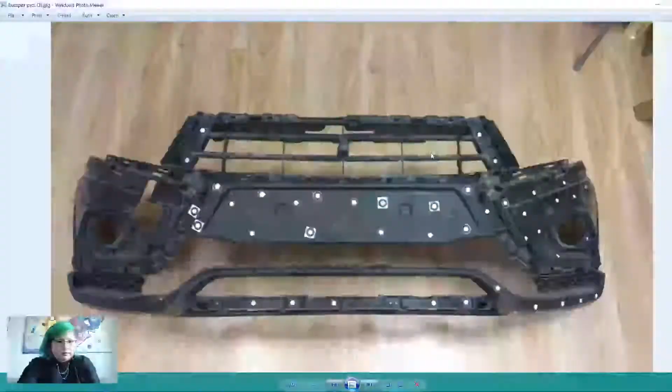Okay, and now you see on the screen a photo of the car bumper that I scanned. So as you can see on the left and the right sections where there would be the front lights, there are a lot of geometric features for the scanner to easily grasp. So those sections can easily be scanned in geometry mode in Calibry.

So now on the middle front section here, you do see that there's a lot of flat parts, so there are not enough geometric features for the scanner to grasp. Now, for example, if you were scanning a whole car, it would definitely be a good idea to scan it in marker mode, as the majority of the car, the front, the sides, the doors, don't have much geometry, so combining all of those scans in marker mode would be the best.

So this car bumper can be done in one scan, so you can place markers all over it. You can see that only about 2/3 of this bumper is covered in markers. When I scanned the bumper, I did apply markers all over it, so it is possible to do it in one big scan. You can also do it in sections and then align it in Calibry Nest. And that is what I will be showing you today. So let me go ahead and switch to Calibry Nest.

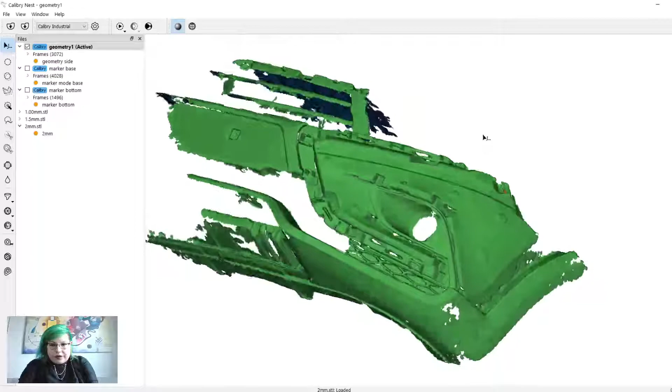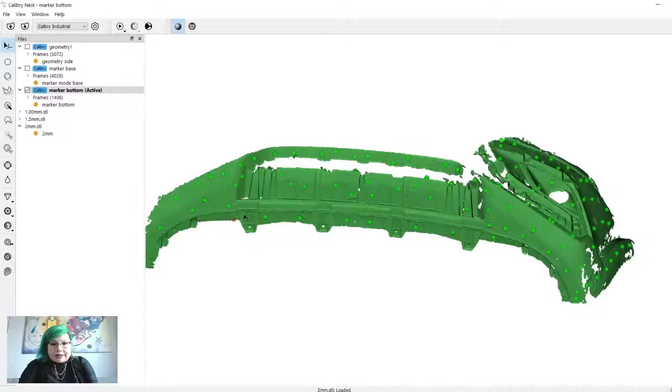Okay, and now you should be seeing the interface of Calibry Nest. So I scanned this side section here, where there's a lot of geometry, in geometry mode. So the scanner was able to grasp those features quite easily. Okay, and then I also scanned the whole surface in marker mode, and you can see some of the tracking markers on the surface, and I also scanned this bottom section additionally, also in marker mode.

So I have already post-processed each of these scans, which means that I have run the algorithm of registration and finalization on all three of these scans. So I have created a mesh model of all three of these.

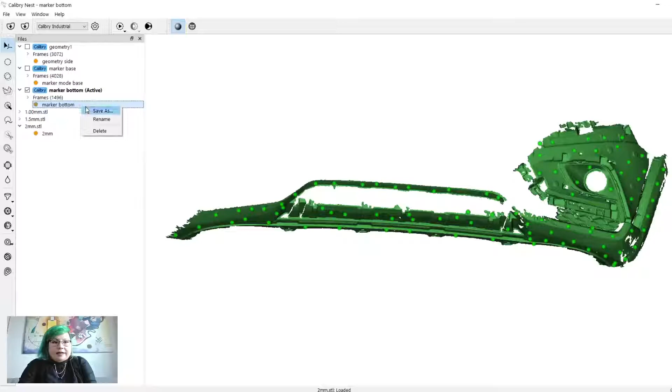Okay, so at this point, as Calibry Nest doesn't automatically save your results, you can go ahead and right-click and save all of your results separately in any format you want. You can also save the entire project with all of the changes you made and any of the multiple results that you generated by running the finalization algorithm.

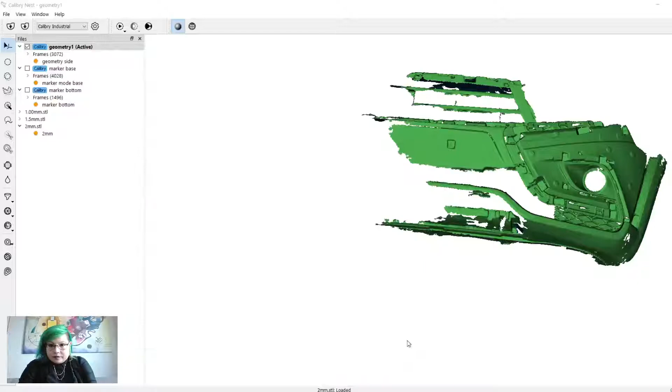Okay, so generally, most people, if they scan something in marker mode, they can easily align it in marker mode, and the markers help the overlapping sections come together quite easily. But if you have a piece scanned in geometry mode, like this side, it can also be quite easily combined using the same algorithm.

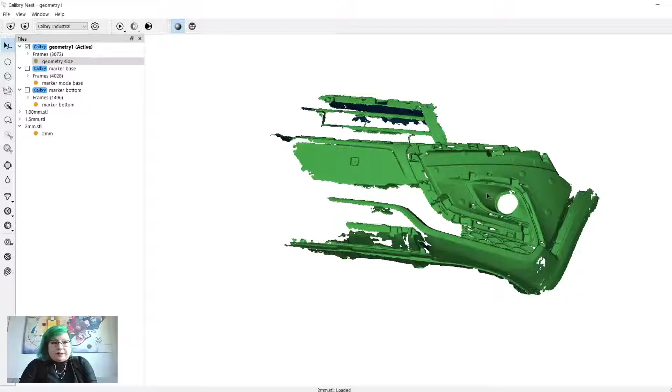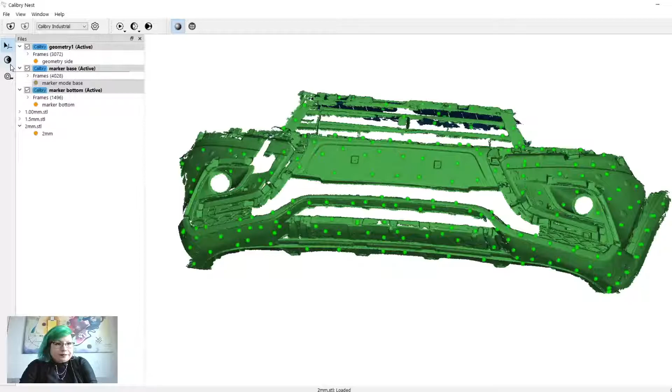So I ran the results for all three of these already, and now I can go ahead and select all three of my projects that I want to align. And at this point, we have this Align by Points button that should pop up. So I go ahead and click on it, and it takes me to the alignment window.

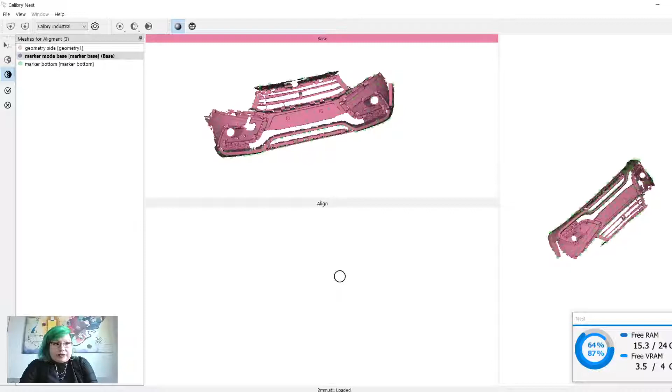Okay, I can set whichever piece I want. Usually I try to set the biggest piece as my base, and then I can add parts to it. For today I'm going to be combining just these three pieces. You can always combine 2 scans, 5 scans, 10 scans—it does not matter, the same technique will be applied to all of them.

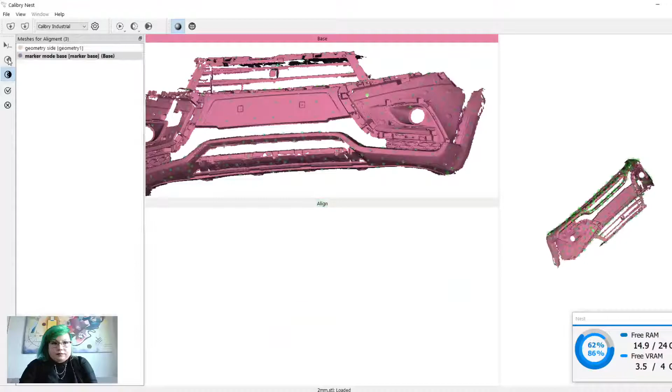So here are 2 scans that were made in marker mode—this part and the bottom part—and you can see there are overlapping sections. At this point, I just go ahead and press this button, Add to Base. Okay, and it automatically combines those scans by their overlapping markers. Quite easy, I don't have to do anything, I just have to add the 2 layers together.

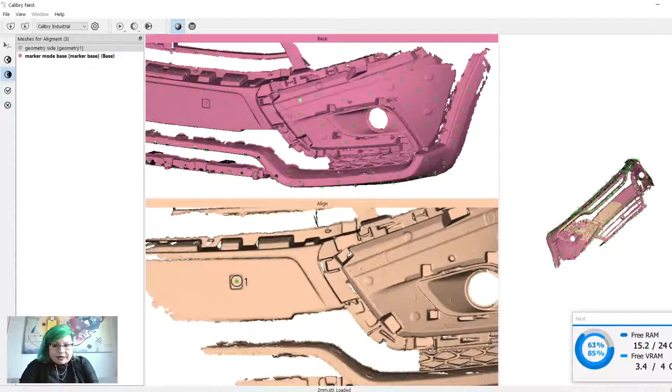Now, our geometry section has to be added in geometric alignment. To align pieces in geometry mode, you have to select at least 3 common points that our 2 scans have in common. I usually try to space these points quite far apart so that the algorithm has more information to combine. So I just apply these dots by double-clicking my mouse, like this. If I don't like where I have placed a certain point, I can always go back, double click on that point, and it disappears, okay?

And on the right hand side here, just drag that here. On the right hand side, we can see the preliminary view of how your alignment will be coming together. So if I'm happy with how this will be looking once I combine them, happy with the dot placement, then it looks pretty good.

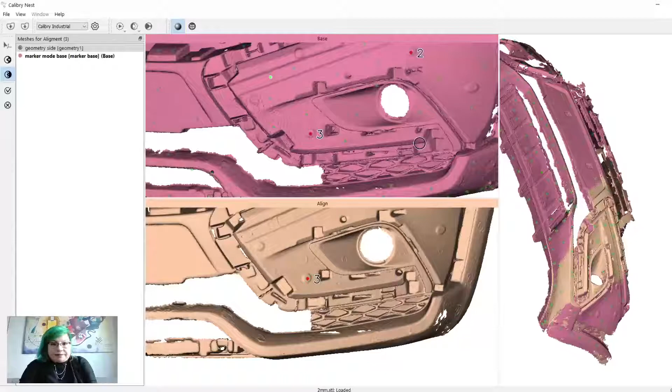I can always add more than 3 points—I can add 6 alignment points, I can add 10—but the algorithm will still kind of calculate it from the base 3 that we set. So as you can see, it will be combining quite well together, so we don't need to place any more points. It looks pretty good in our preliminary view here, and I also add that to base now.

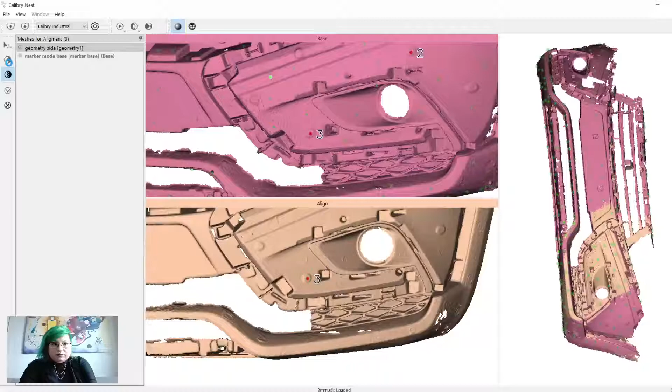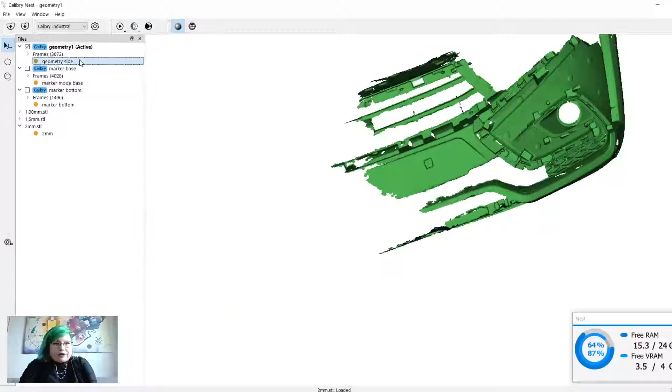Okay, so now we see a preliminary view of how our 3 scans will be coming together. This is still the preliminary view, we haven't combined the meshes yet. At this point is where we will be running the multiple registration and finalization algorithms. If you remember, we generated each separate result here to help us align. So running the same algorithm for all three will generate one solid mesh of all of your selected aligned scans.

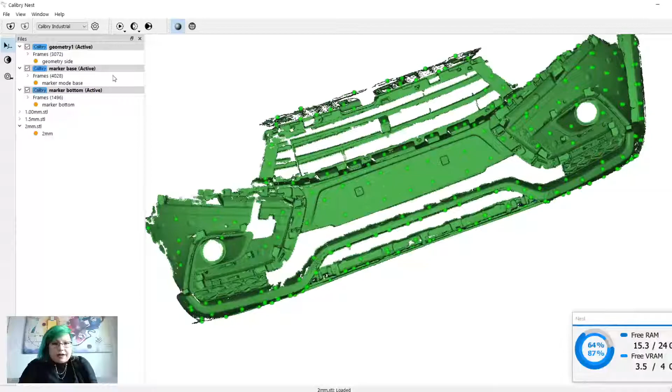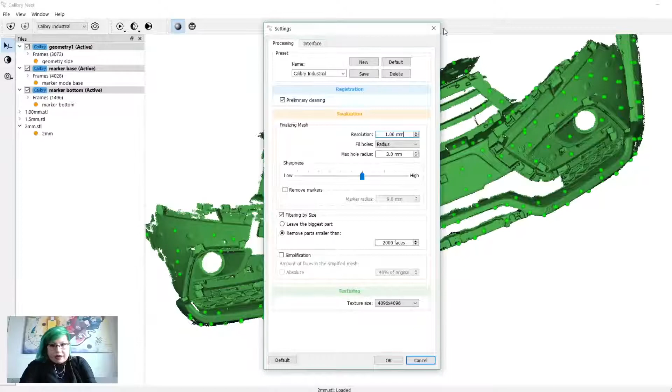Now, depending on the size of all of your scans, plus the speed of your laptop or computer—as you can see, I have opened up the memory tab so you can see how much of my computer's resources are currently being used. Okay, so initially when I made this model, I made it at about 1 millimeter of a combined mesh. Now that did take about 15 minutes total to combine all three of these scans.

So I'm going to be saving us a little bit of time, and I will be showing you the already finished results. I ran the algorithm multiple times and I generated several results, so let's take a look at the difference in what setting different resolutions will do for your finalized mesh.

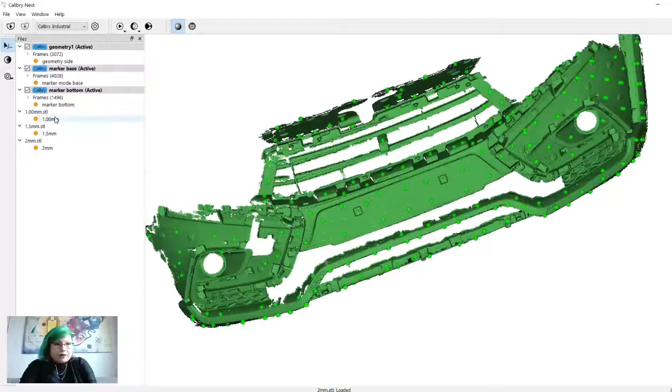So this was the result that was made when I made the setting for 1 millimeter, and that model did take 15 minutes to finalize and generate. You can see a lot of the detail—you can see both the marker mode and the geometry mode came together really seamlessly.

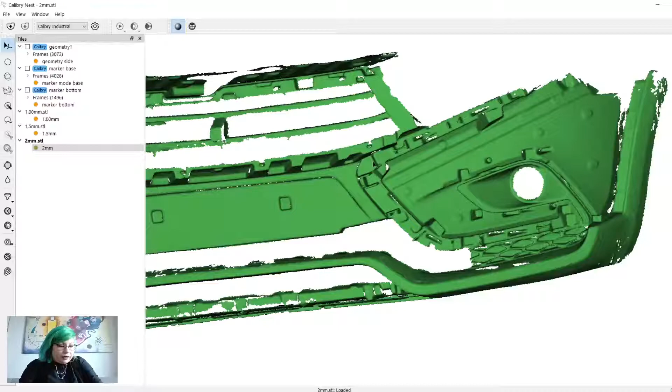It looks really good. I also ran the algorithm here at 1.5—you don't really see a big difference, just your model does less. And here it is at 2 millimeters, and that 2 millimeter model took me about 8 minutes to generate.

So depending on how low you set the resolution will determine how long the algorithm will generate your finalized mesh. You can always play around with that and see kind of how much detail you're willing to spare for the sake of faster processing.

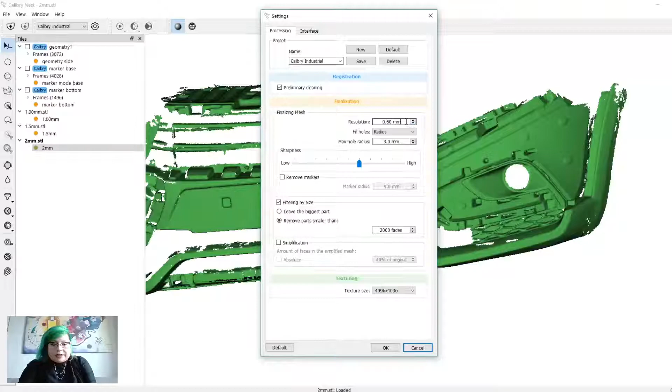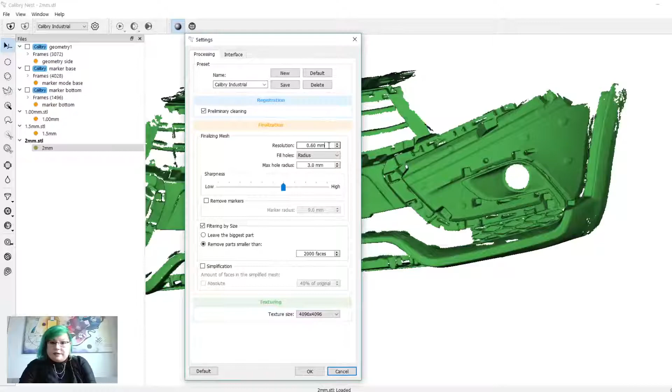As a reminder, the lowest possible resolution for the regular Calibry is 0.6. So of course it is possible to combine all of these scans at 0.6 to get the absolute crisp clarity, but then again it would take up more time and more of your computer's resources—possibly anywhere from 15 to 20 minutes depending on the speed of your computer. So those are the main factors to consider when you are merging scans.

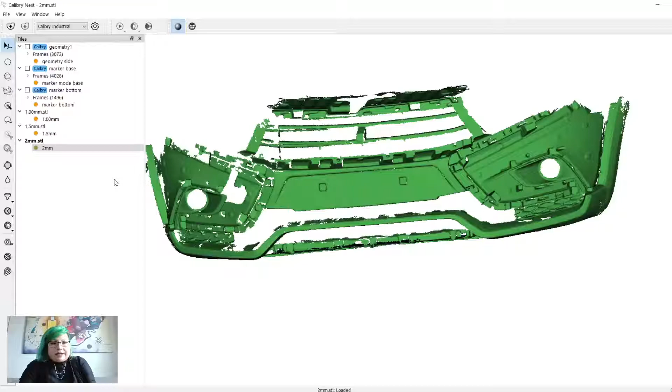Also, going back to each of my pieces, my base scan is about 4,000 frames, my geometry section is about 3,000 frames, so the weight of each of your individual scans also does influence the speed of your finalized combined mesh. So if you are combining many pieces that have a lot of frames each, then of course combining all of that data would take substantially more of your laptop's resources and your time.

If you're curious about the minimum specifications necessary to run all of our scanners as well as Calibry Nest, we do have that link available on our website.

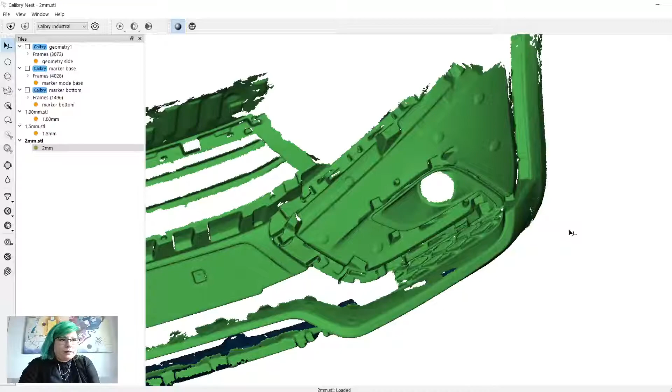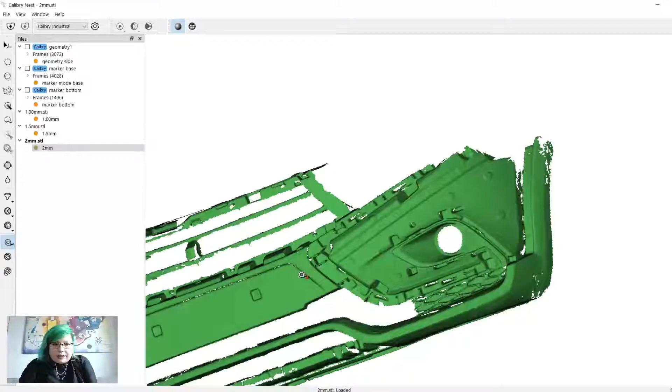Very good question regarding accuracy. For example, if I want to see how close to reality this finalized mesh is, I can use any of my tools on the side here in Nest. For example, the ruler - I can place 2 points anywhere on my model, and it will measure the distance, and you can compare it to the actual object that you have.

Now when you are aligning, you can see that all of the pieces came together quite nicely. If we go back to each individual scan, we can see how they looked, and since there are no ripples between where the scans would have combined, it looks pretty good.

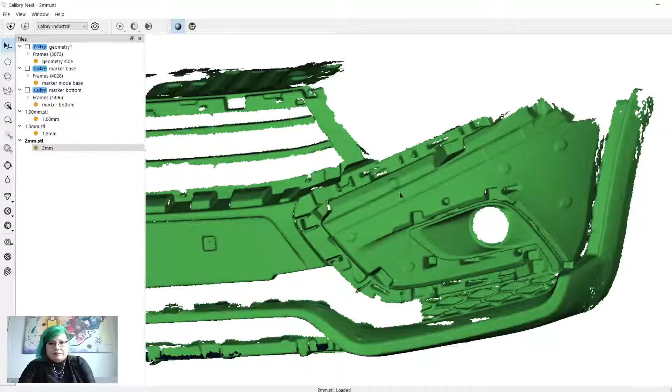So we do have that ruler option to measure any points on your model. We also have this option at the very bottom called the geodesic distance, and that can measure points along the curvature of any of the sides of your model.

And how that works is also shown in our manual. You can easily access the manual to read about any of the features in Calibry Nest. You can just pop open the help option, press F1, it goes to the manual, or you can also click on the manual section under the download section on our website.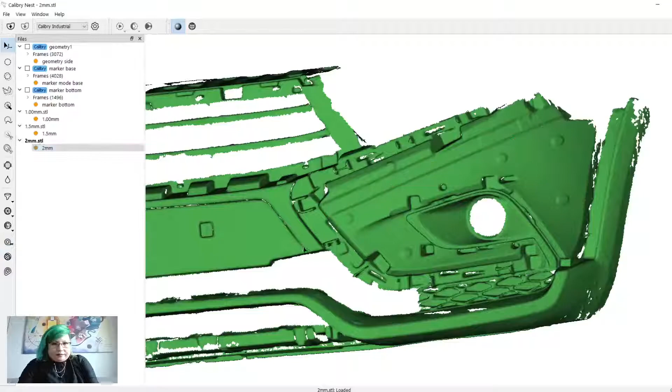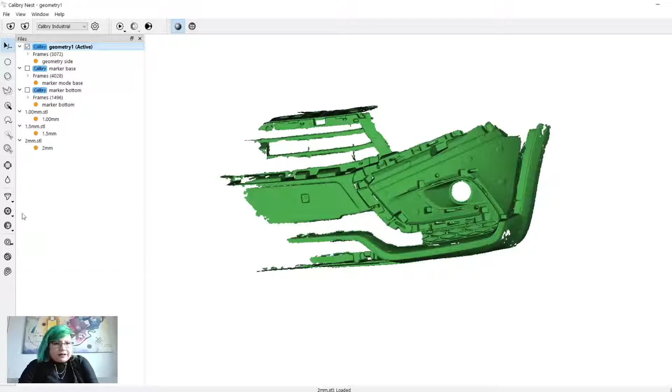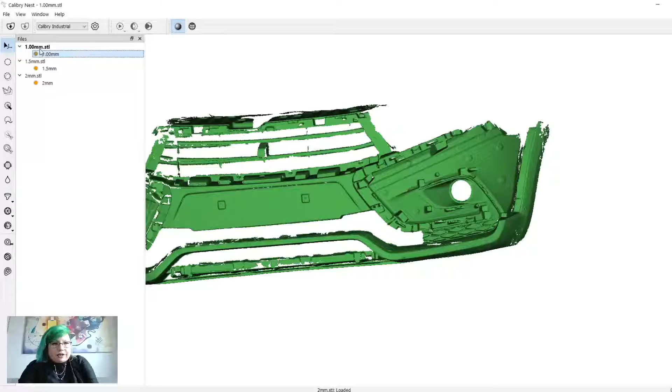To save my computer's resources, I am going to go ahead and close all of the scans that I currently have open. I can just go ahead and load in the next scans I will be working with to this list, but the more scans and more projects I have open at any time in this tree does consume more of my computer's resources. So if I am finished with those results, I try to close them out.

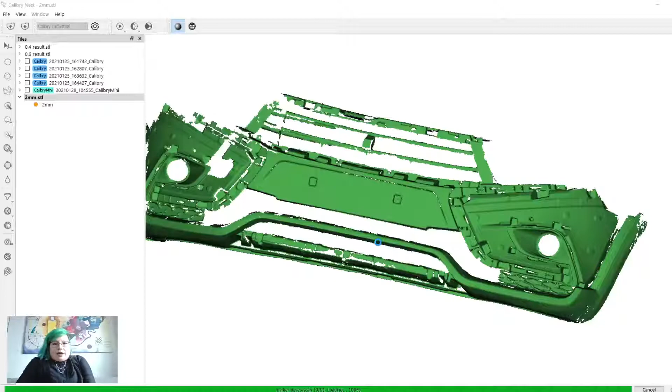While that final scan is loading, let me address the newest question we have regarding how to make better models ready for 3D printing. Once you have a result generated, you can save that mesh as an STL or an OBJ, depending on what program you will be loading it into afterwards. That is where we recommend that you export that STL or OBJ into other software, for example MeshLab or Geomagic or any of those other programs for finalizing a really crisp mesh, and that is where you can generate models perfect for 3D printing. So Calibry Nest just generates the initial STL and OBJ files that can then be post-processed further.

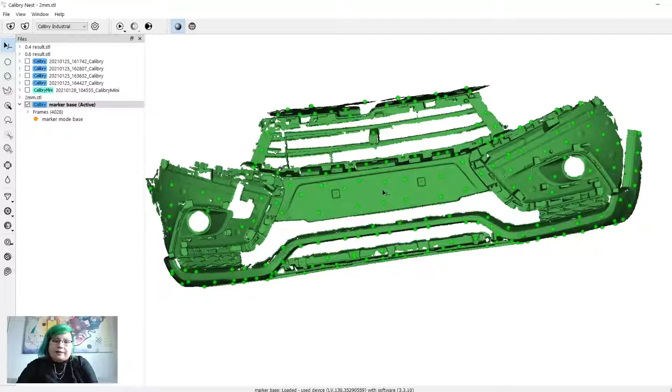And regarding those other programs, we do also collaborate with those manufacturers, so you can purchase different bundles with discounted prices depending on which software you need to use.

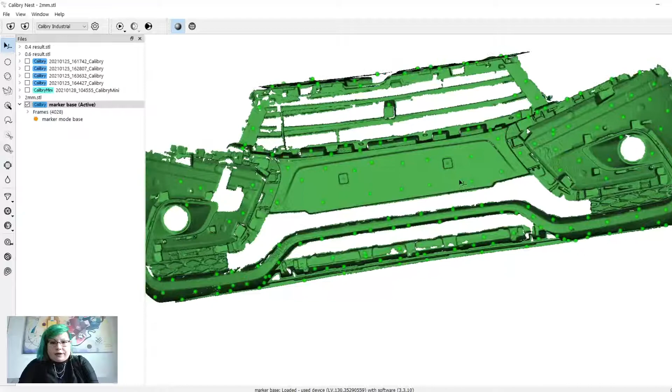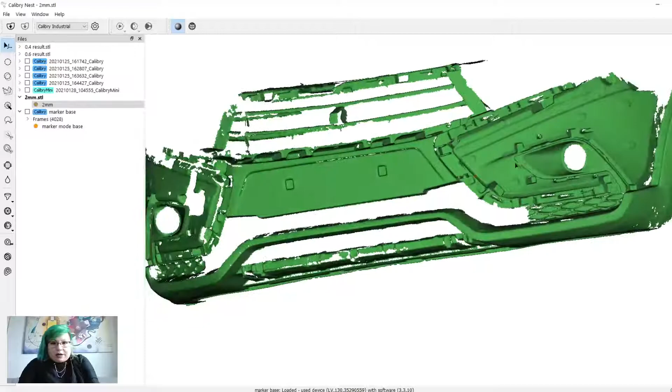So coming back to our model with these markers on the surface - if you are working on the model and you need to remove these reference points, those can easily be removed. If we go back to the actual STL, the merged STL that I had saved, those reference points automatically disappeared. Now you can see on the finalized model that you can still see some of the markers on the surface, and I saved that quite deliberately.

When you are running the finalized mesh, you can always check this box to remove markers and set the specific radius depending on if you were using square markers or if you were using circle markers.

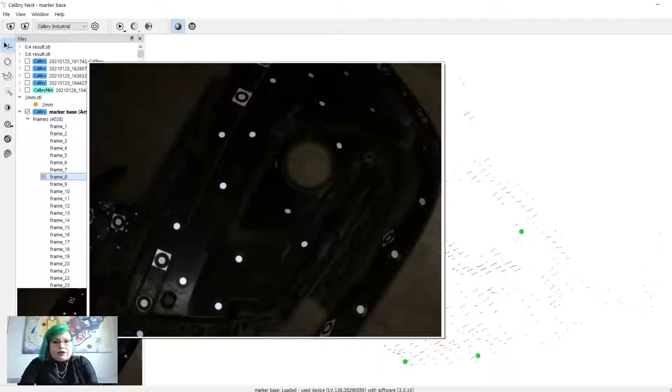If I quickly pop open the frames here of the bumper, you can actually see that when this bumper was scanned, it was covered in a combination of completely circular markers that were cut out completely, but also some square markers that still had this white rim on the outside. Now, we just covered the bumper in whichever markers we had available. The marker radius itself is the same, so the scanner still sees them exactly the same, whether they have that white rim around them or not.

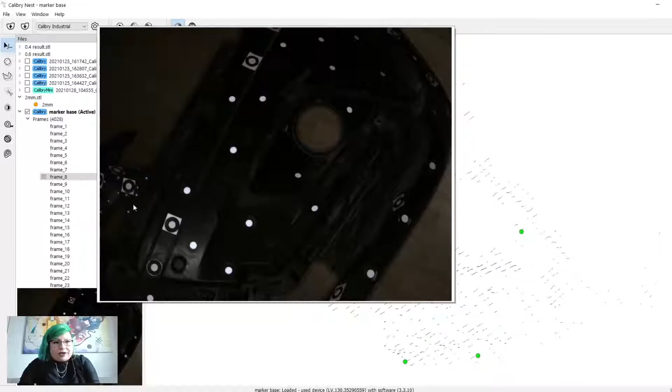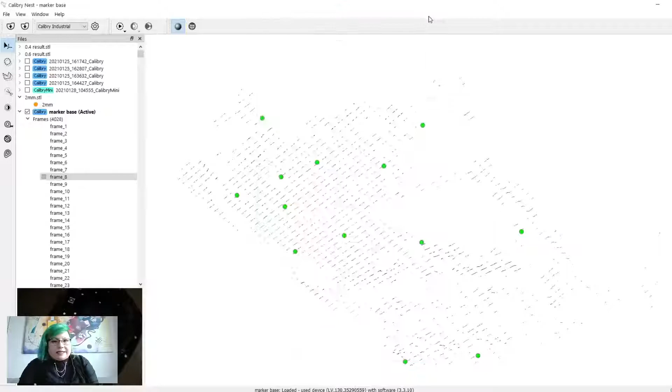But the issue is if you are using that combination of different markers, then on your finalized mesh you would have to set different parameters to remove markers. If they were completely circular without that white rim, you would set it to 9. If you had those square markers with the edge, you would need to set that radius higher. Because the bumper was covered in a combination, if I set that radius too low or too high, it would remove some of those markers but not all of them, still leaving the edges or some of the holes depending on the radius I set.

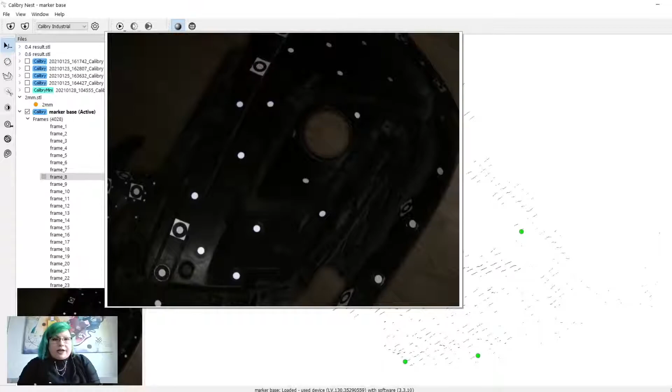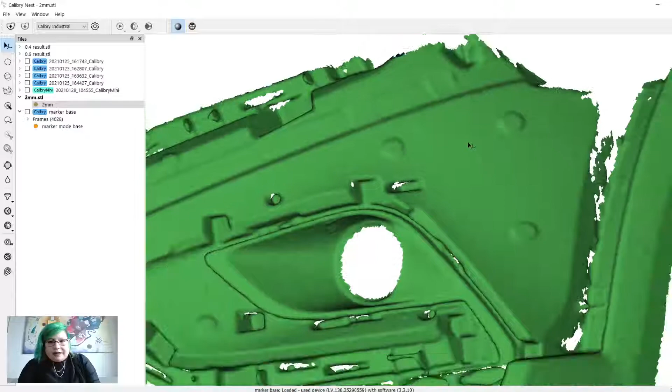Coming back to removing just the green reference points that you see on the first models - those green reference points don't automatically disappear, they're just for working in the software. What you can do to remove them so you don't have to look at them, I can select any of my removing tools on the side here. For example, I really like to use the Marquee double-sided brush.

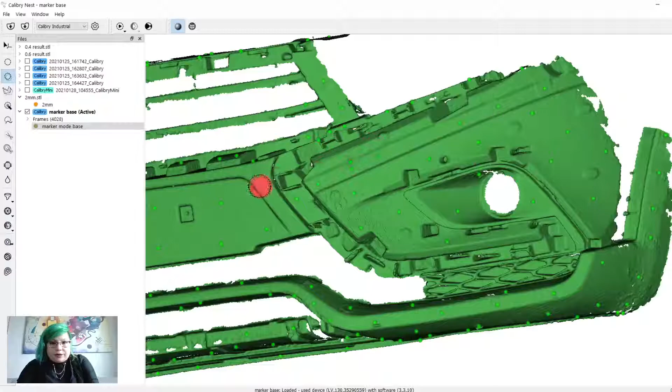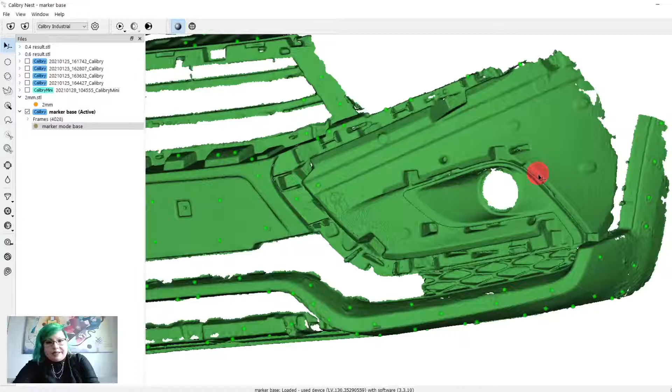This is a brush that just removes any sections of the mesh that you don't need - it's just like an eraser. What I can do, if I just move the eraser, it will cut out a section in my mesh. But if I select this tool again and hold down the Shift button, then I would be selecting just my green reference points. When I hit delete, it removes only those reference points, but it does not remove the markers on the mesh, because those had to be preserved during the finalization algorithm. So you still see the markers on the mesh that I didn't remove deliberately, but those reference points can be removed using your eraser tools.

Any other questions about the marker bumper scans before I move on to my next model?

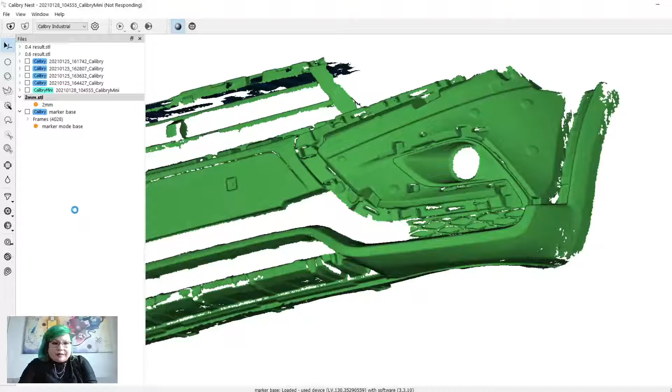Like I said before, my computer is kind of slowing down quite a bit because I have so many projects open and also because I am simultaneously streaming. So give it a second. Let's go ahead and close those out. Okay.

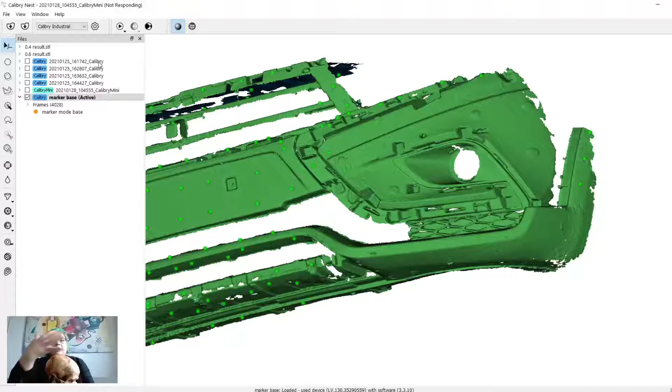The next object I will be taking a look at is this plastic replica skull - he's not real, he's very plastic. This was done by making several scans. There were several general scans of the whole head shape done with the regular Calibry to get all of the multiple sides. Since you do see a lot of flat, rounded sections without much geometry, especially from the back of our scans, let me pop these open.

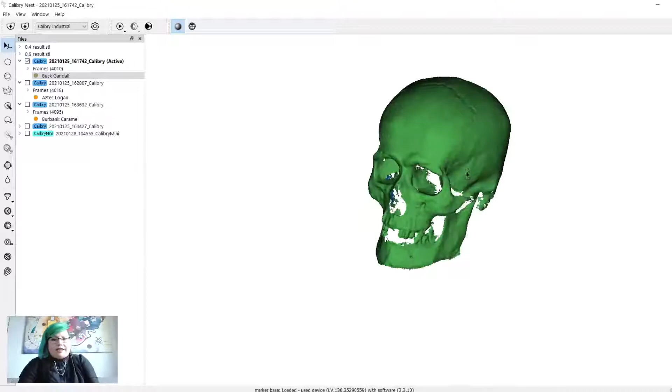In order to scan that, there was actually additional geometry placed around this object - just crumpled pieces of paper to maintain that geometry. You can also scan such an object in marker mode, so you can place markers on the floor around it, and that can be used to hold tracking so that the scanner can still see the object. Here we have multiple scans done from all of the different sides - a scan done of the front and top section, then one of it placed on the side.

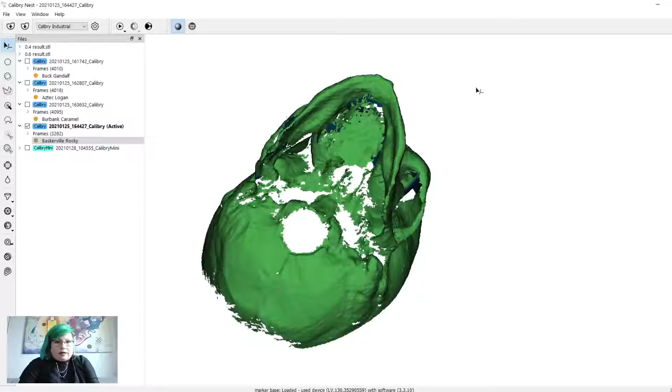Here's the other side. And here is the bottom section. And then finally we have the Calibry Mini scan of just the front features, and you can definitely see those very prominently. And every scan, depending on which scanner was used, would be listed in our project tree. So you can see the ones done with Calibry are clearly labeled Calibry in dark blue, and the Calibry Mini scan is labeled in light blue.

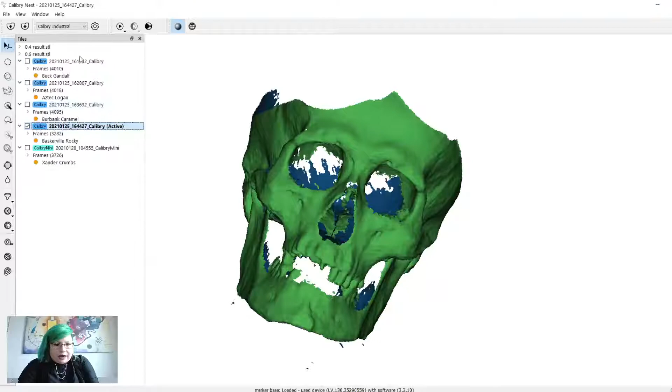And whichever scan I select, you can actually see at the bottom the name and the serial number of the scanner that was used. So for example, these were done with the regular Calibry, and it has one serial number attached. And then the Calibry Mini was, of course, a different scanner. You can see I have already post-processed the results for each of these scans.

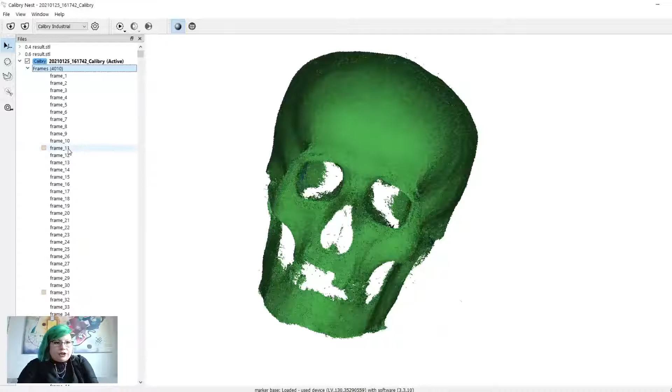Now, if I pop open the frames for a moment, just to show you what the setup looked like. You can see that there was crumpled paper placed around the skull so that geometry tracking would not be lost. So whenever you are scanning something that has a lot of flat sections, this is what we recommend so that the tracking will not be lost and you would have a good result.

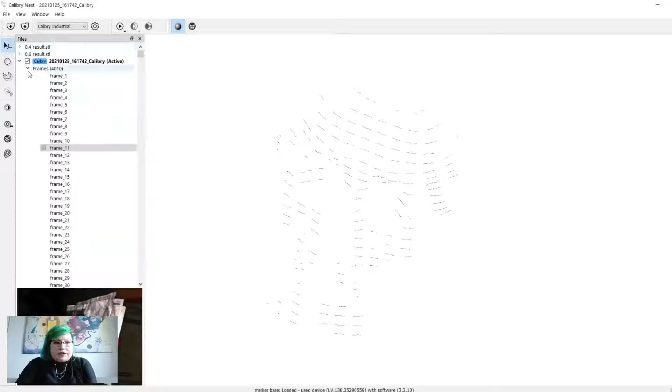So I have already cut off all of that excess geometry from my results, and I have run the finalization algorithm for each of my results, and you just see the model. And now since all of these scans were done using geometry mode, we can select them all and then align them in geometry.

I finalized each of my Calibry results using the default Calibry resolution. I actually increased it a little bit. I did process all of those scans in 0.6, just so that the processing of each of those pieces would be a little faster. The Calibry Mini, as it is intended for smaller objects and has a smaller field of view, that scan was of course processed with the lower resolution of 0.4.

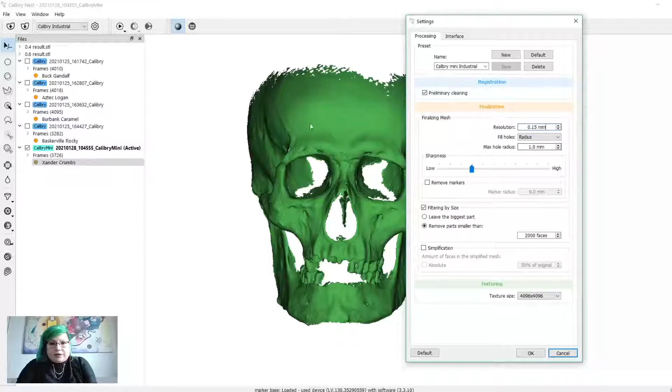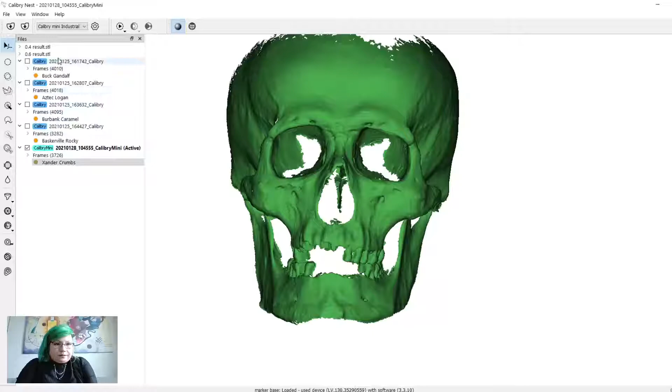So the lowest resolution we generally recommend if you are using the Calibry Mini is 0.2, or the lowest 0.15. So this specific scan, I finalized it in 0.3, and you can still see a lot of the features and all of the dents; the Calibry Mini is really good for grasping those details. So now let's combine all of these scans. I already finalized all of my results and I cleaned them all up.

Again, I select all of my projects that I want to combine, and that pops open our alignment algorithm. And like we did before, we would need to find at least 3 common points on each scan for the algorithm to combine them. And once again, try to space these out so that the algorithm has more data to work with.

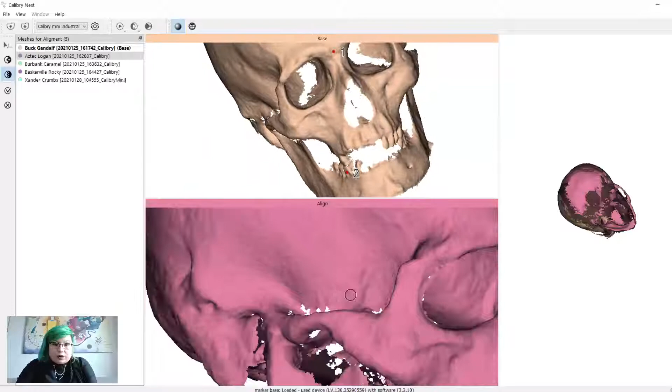Put that in there, put that there. And we can always look at the preliminary view on the right to see how it's shaping up, if we need to place more points or if we need to change the points. Okay.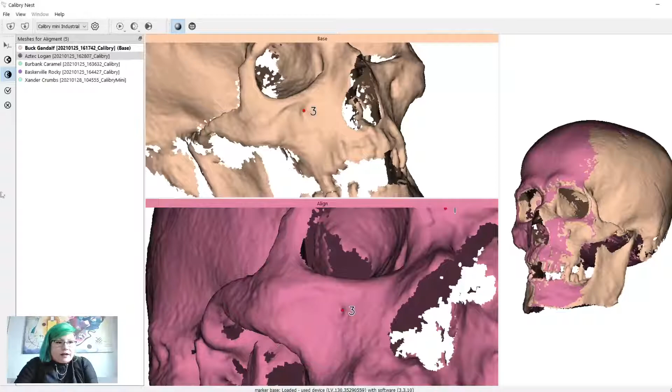Very good question. If I want to scan the skull from the bottom, let me exit that for a moment. So this was the section that was, there we go, scanned from the bottom. You can see it was kind of sitting upside down while it was being scanned. Let me actually show you the frames of how this was done.

The setup was that it was sitting on a crumpled sheet so that all of those folds of the fabric were used to help keep track of the object. The bottom does have a lot of geometric features by itself, as you can see. So tracking generally won't be lost when you have a lot of features like that, but as a precaution we still placed that sheet underneath so that those fabric folds can help the scanner not lose tracking.

Like I said before, instead of using additional geometry, you could place markers on the table around the object, and then use the markers to hold tracking. So that is also possible.

If you do want to get a lot of the intricate detail, like you do in this skull, I could have also scanned the very inside bottom here with the Calibry Mini. And the Calibry Mini would have definitely had no problem getting all of these geometric features very clearly. But for our experiment today, I just have my Calibry Mini scan of the face features. All right. Go ahead and select those again.

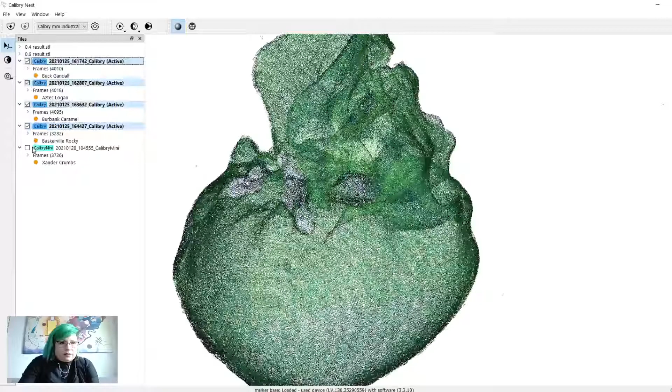There we go. All right.

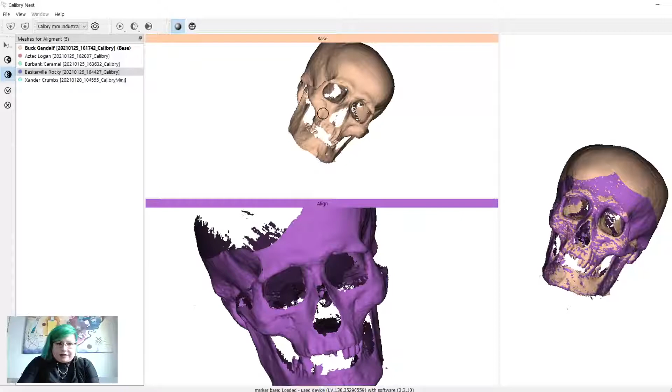So here we are. I am combining five different scans, and I am just setting my three points, and then adding each to base after I set those points. Now, you can actually see that I saved each of these projects with the results after I had aligned them, which is why right now you are seeing them already aligned if I click on any of these results.

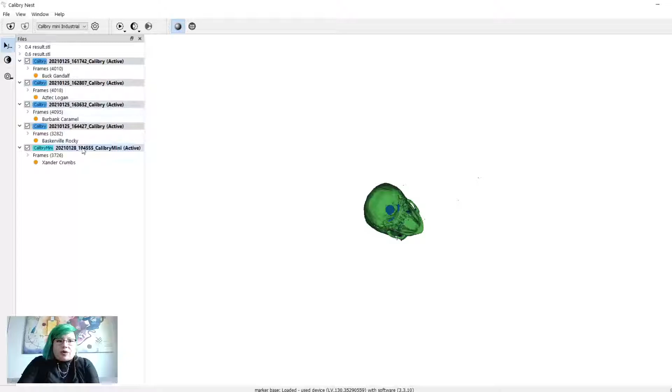So after I had aligned them, I saved all of those projects, so I don't have to go back and redo that alignment algorithm, because all of those actions were saved to all of my projects in my project tree, which is why when I'm selecting all of them and I see my preliminary model, it is already aligned. So we highly recommend that once you have aligned all of your projects, just to be on the safe side, save all of them individually, just in case the software ever crashes or something goes wrong, so you do not have to redo all of that again.

Okay, so to save us time, since I did alignment of all 5 scans, and you can see the scans are all quite large, between 3,000 and 4,000 frames, to combine them all did also take about 15 minutes. So to save us time, I will be showing you the results. As I said, the lowest resolution for the regular Calibry is 0.6, and the lowest resolution for the Calibry Mini is 0.2. So if I'm combining scans between those, I can set it to the absolute lowest resolution of the Calibry Mini. That is absolutely possible, but then the algorithm would take substantially longer, probably 20, maybe even 25 minutes.

I did generate one result. This is on 0.6, the lowest resolution for the regular Calibry. But the general advice I like to give when combining Calibry and Calibry Mini is to find that perfect compromise of resolutions. So I try to set it between my 0.6 and my 0.2, and this here is the result that was done with 0.4.

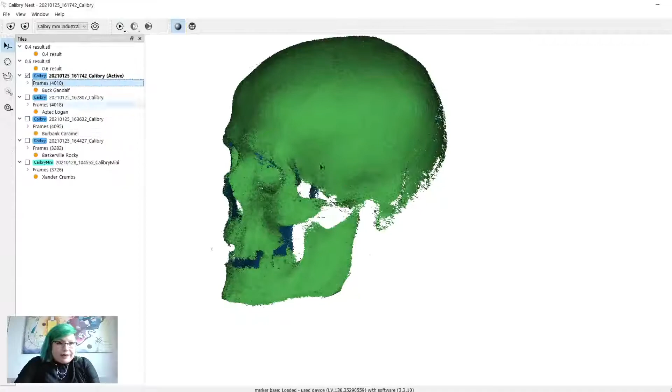Also, as a side note, as I do see this question popping up quite a bit: let's say I processed all of my scans and removed my additional geometry from each of my results, which is good, it helps us to clearly see where we need to place the points when we align. But prior to running our multiple finalization algorithm, please make sure to remove all of your additional geometry from the frames of each of your projects.

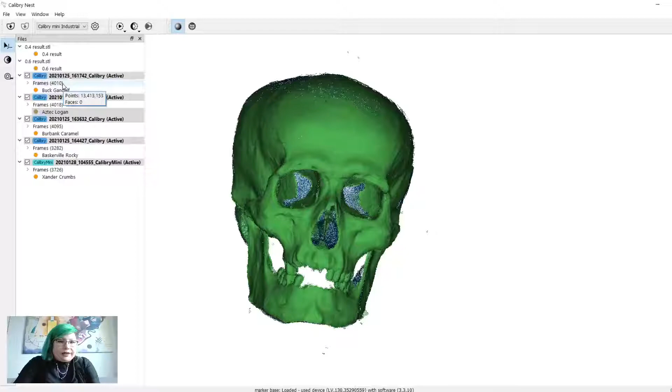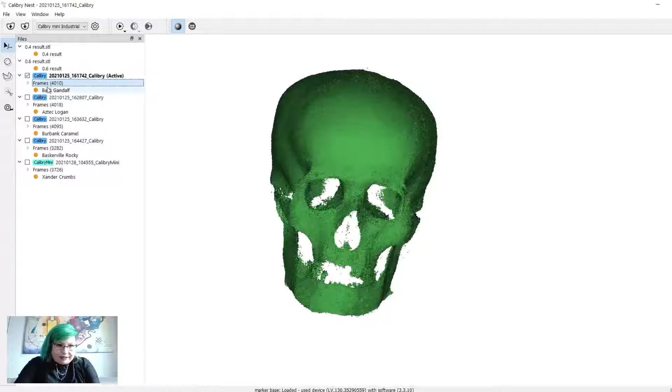Because while the individual results do have that additional geometry removed, once you combine the results in multiple finalization, it will take all of the information of the frames of each project. So any additional geometry around it would be on that result. Then you would have your one finalized mesh, but you would have to take time to clean everything around it. So prior to running that, please remember to clean up all of the scans on the frames themselves.